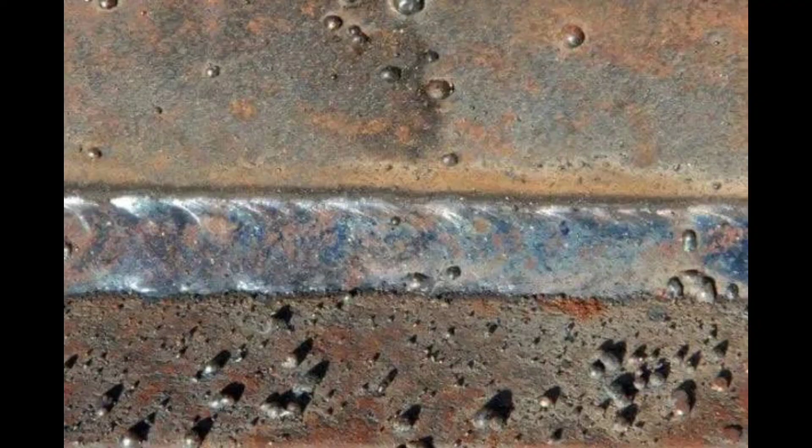So what are the causes of excessive spatter? First is arc blow. Second, welding current too high. Third, too long an arc length. And lastly, wet, unclean, or damaged electrodes.

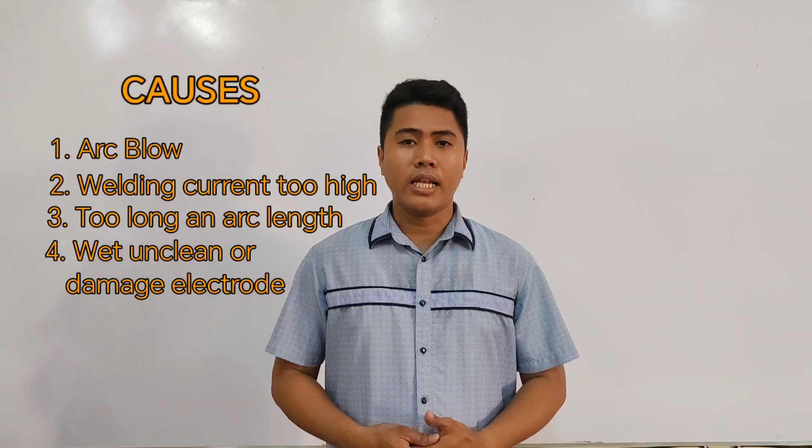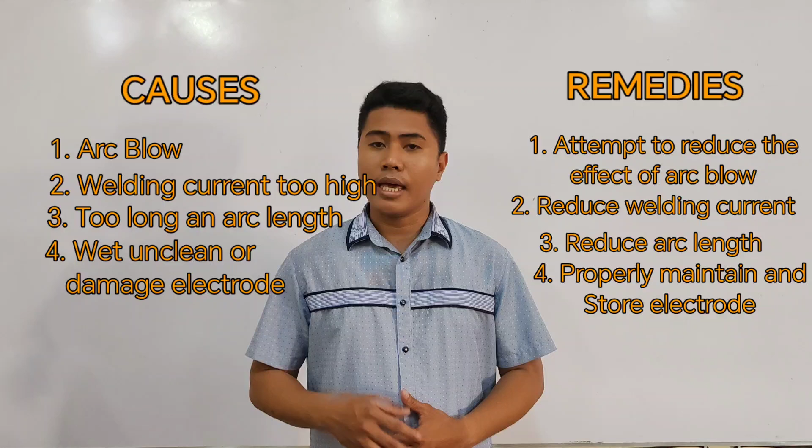So what do we need to do to avoid spatter, or what are the remedies? First, attempt to reduce the effect of arc blow. Second, reduce welding current. Third, reduce arc length. And lastly, properly maintain and store electrodes.

The second welding defect under external welding defects is undercut. So what is undercut? Undercut is an extremely common welding defect. It happens when your base metal is burned away at one of the toes of a weld, a portion of the base metal melted away. This is an example of undercut.

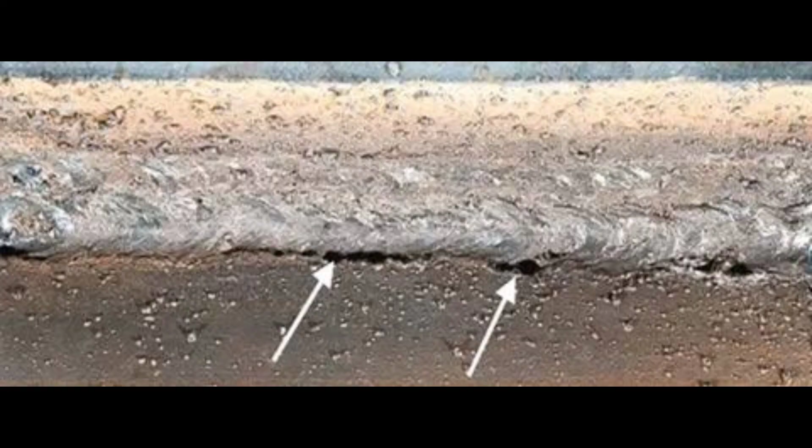So what are the causes of undercut? First is wrong electrode manipulation. Second, welding current too high. Third, too long of an arc length. Fourth, travel speed too fast. And lastly, large electrode diameter. Those are the causes of undercut.

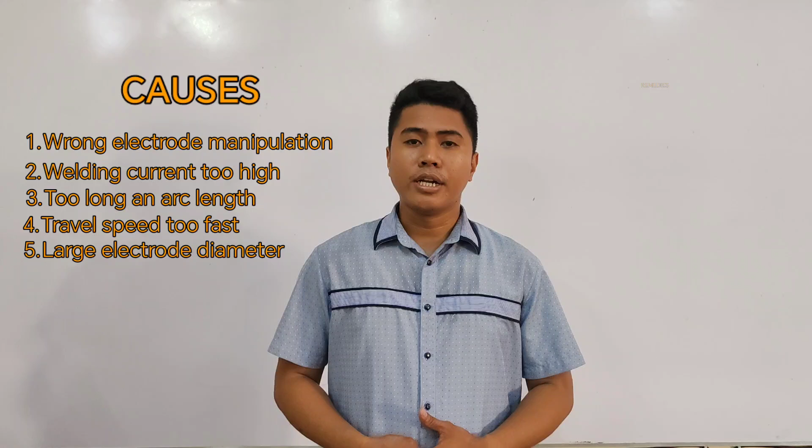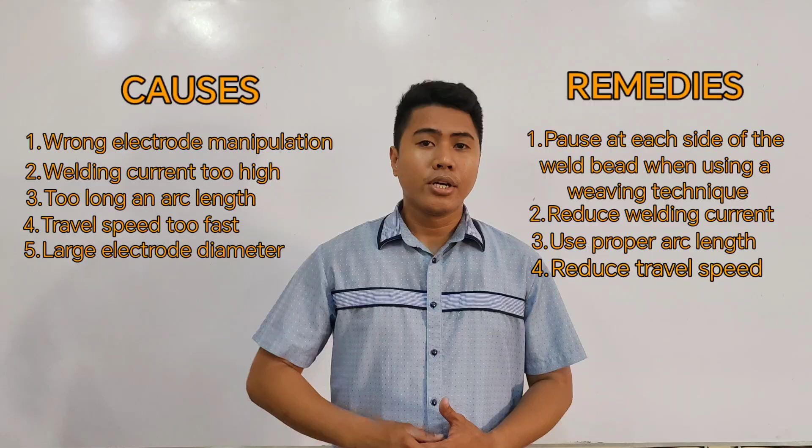Let's proceed to the remedies, or what we need to do to avoid undercut. First, pause at each side of the weld bead when using a weaving technique. Second, reduce welding current. Third, use proper arc length. Fourth, reduce travel speed. And lastly, choose the correct electrode diameter based on the thickness of your base metal plate.

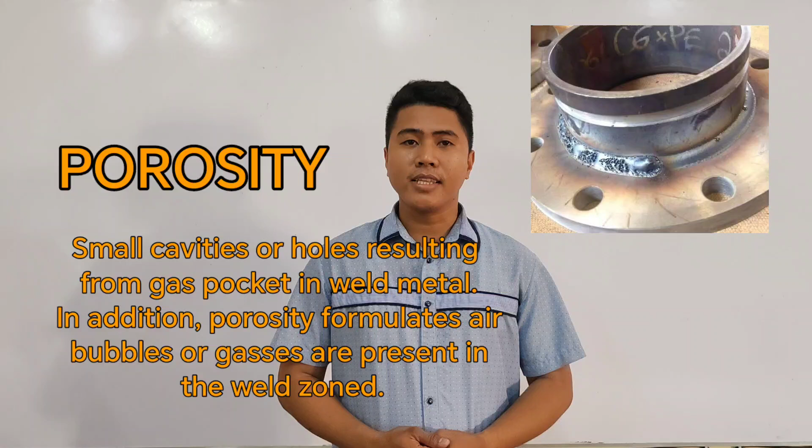The third welding defect under external welding defects is porosity. So what is porosity? Porosity is small cavities or holes resulting from gas pockets in a weld metal. In addition, porosity forms when air bubbles or gases are present in the weld zone. This is an example of porosity.

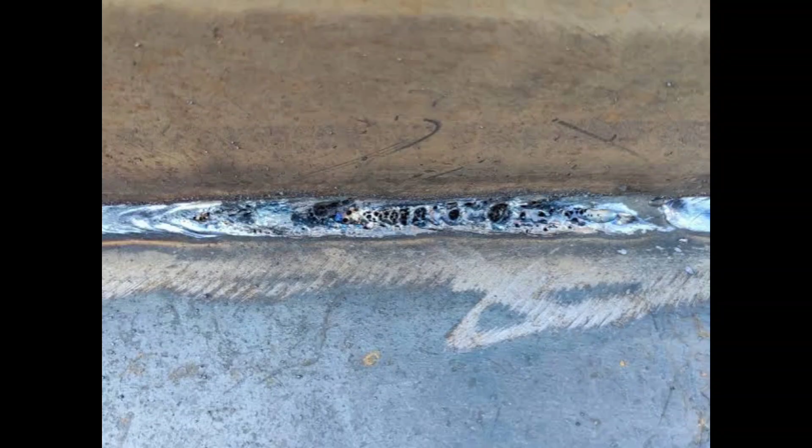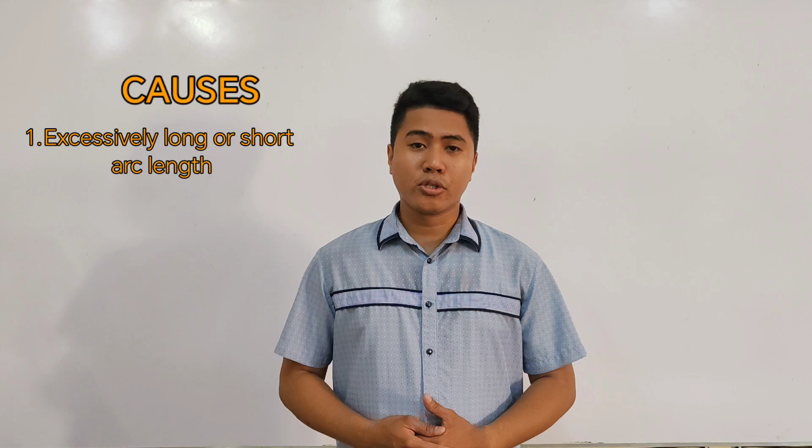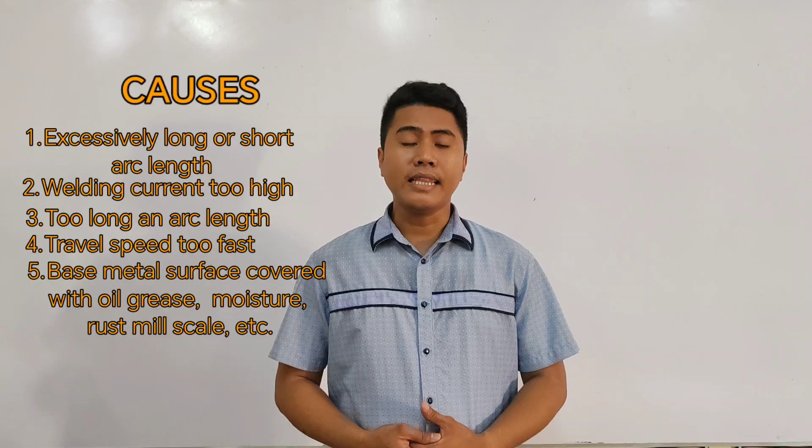So what are the causes of porosity? First is excessively long or short arc length. Second, welding current too high. Third, too long an arc length. Fourth, travel speed too fast. Fifth, base metal surface covered with oil, grease, moisture, rust, mill scale, etc. And lastly, wet, unclean, or damaged electrode.

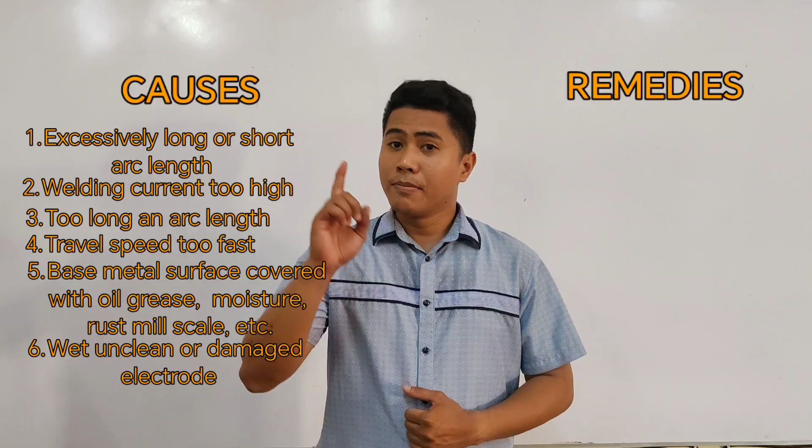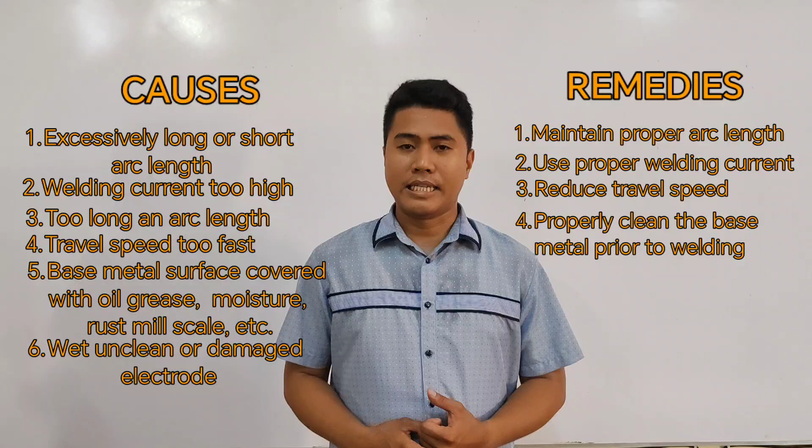So what are the remedies to avoid porosity? First, maintain proper arc length. Second, use proper welding current. Third, reduce travel speed. Fourth, properly clean the base metal prior to the welding process, or prepare the weld materials. And last, properly maintain and store electrodes.

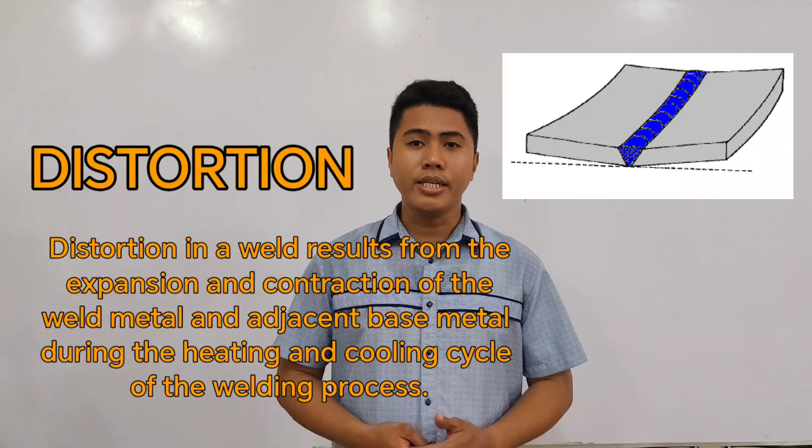The fourth welding defect under external welding defects is distortion. So what is distortion? Distortion in a weld results from the expansion and contraction of weld metal and adjacent base metal during the heating and cooling cycle of the welding process. This is an example of distortion.

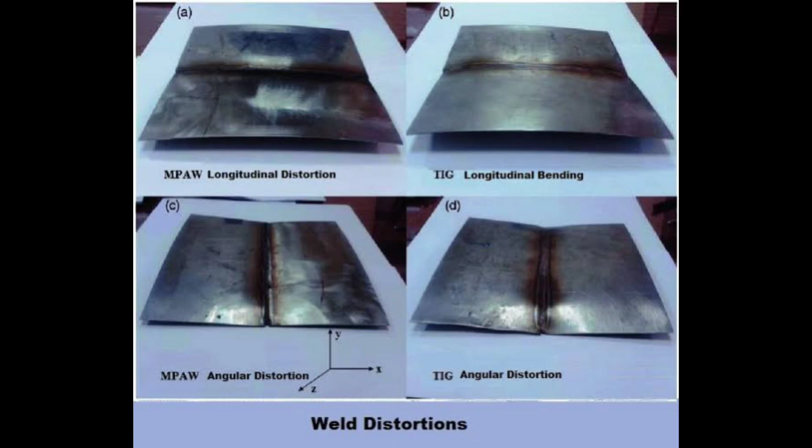So, what are the causes of distortion? First is improper tack welding and/or faulty joint preparation. Second, improper bead sequence. Third, improper setup and fixtures. And fourth, excessive weld size.

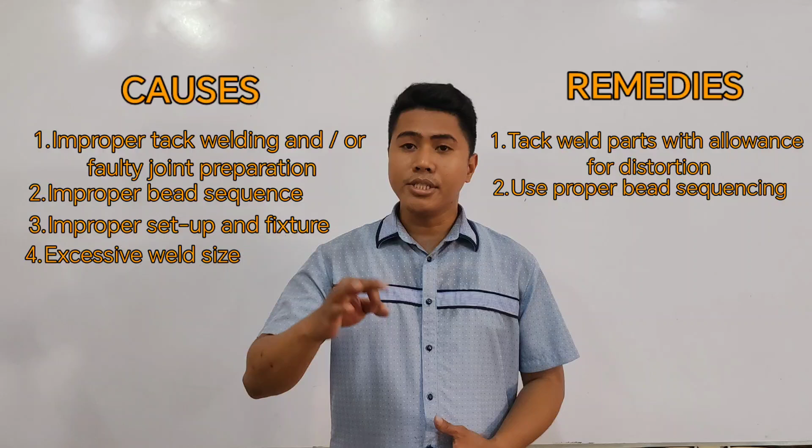So, what are the remedies to avoid distortion? First, tack weld parts with allowance for distortion. Second, use proper bead sequencing. Third, tack or clamp the parts securely. Fourth, make sure to weld to specified sizes.

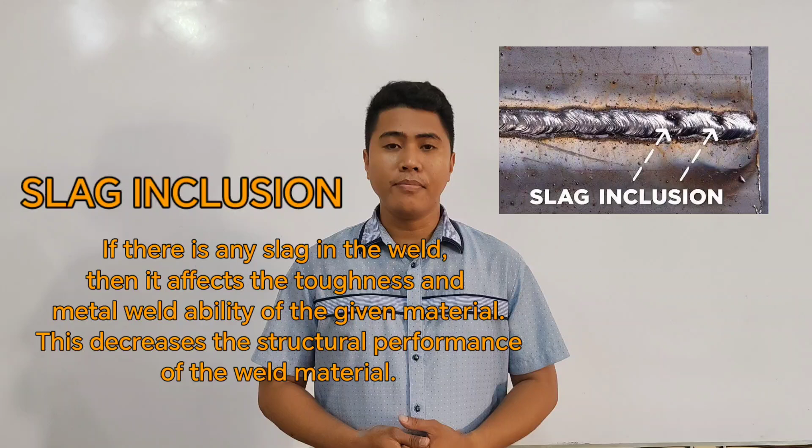Let's proceed to the welding defects under internal welding defects. First is slag inclusion. So what is slag inclusion? If there is any slag in the weld, then it affects the toughness and weldability of the given material. This decreases the structural performance of the weld material. These are examples of slag inclusion.

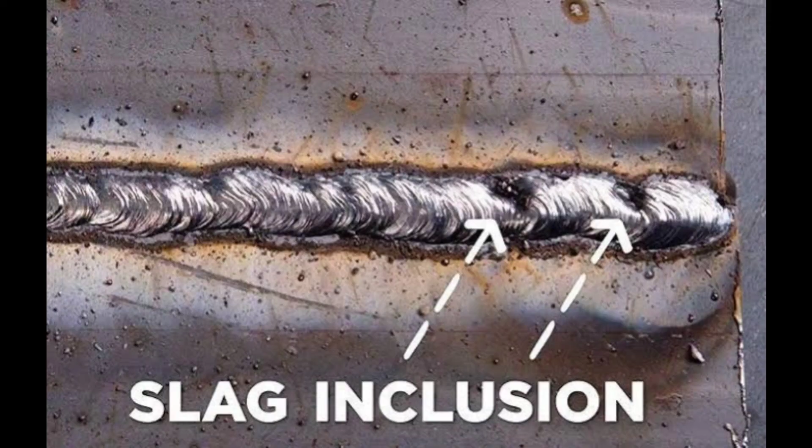So what are the causes of slag inclusion? First is incomplete slag removal between passes. Second, erratic or inconsistent travel speed. Third, too wide weaving motion. Fourth, too large an electrode. And lastly, letting slag run ahead of the arc.

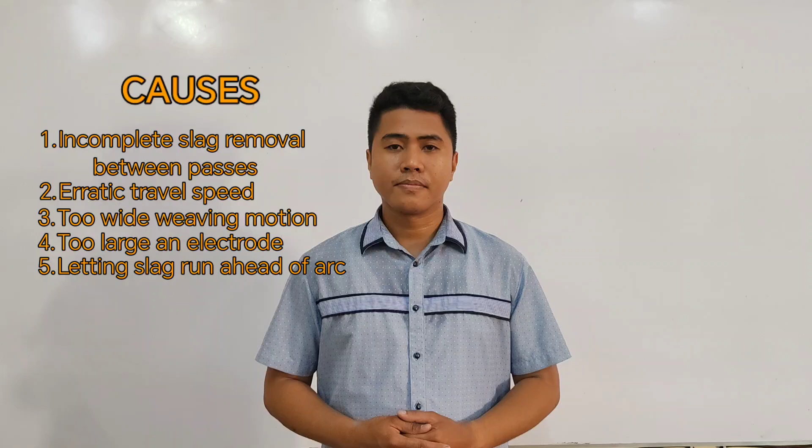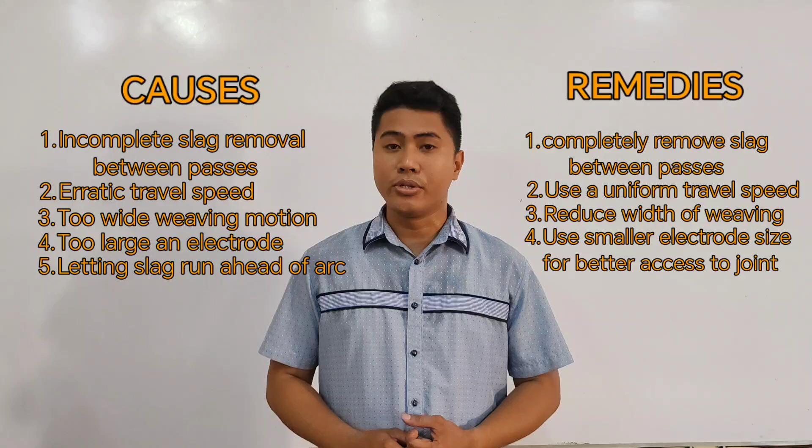So what are the remedies to avoid slag inclusion? First, completely remove the slag between passes. Second, use a uniform travel speed. Third, reduce width of weaving. Fourth, use a smaller electrode size for better access to the joint. And last, increase travel speed or change electrode angle.

Next under internal welding defects is incomplete penetration or lack of penetration. So what is incomplete penetration? It occurs when the root of the weld bead does not reach the root of the joint to weld the opposite surface in the part. This is an example of lack of penetration or incomplete penetration.

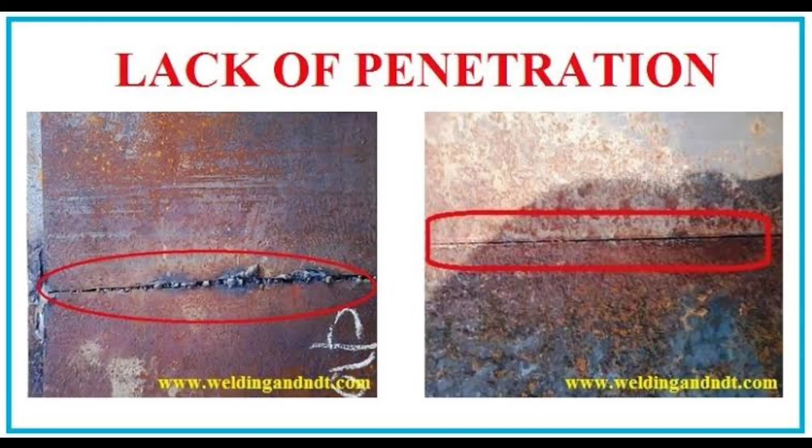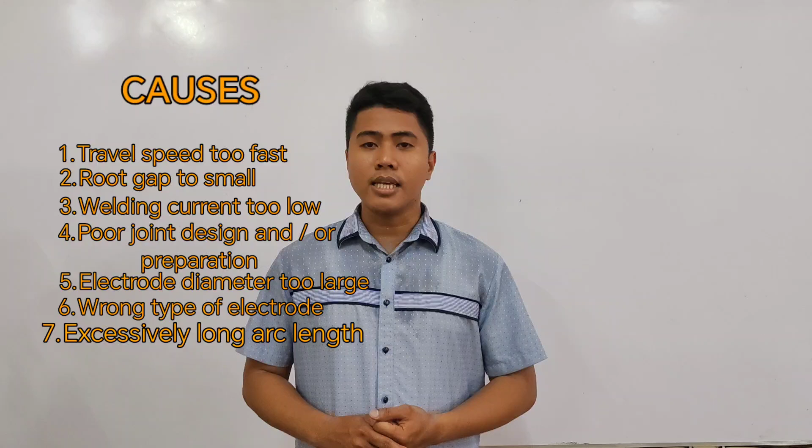So what are the causes of incomplete penetration? First is travel speed too fast. Second, root gap too small. Third, welding current too low. Fourth, poor joint design and/or preparation. Fifth, electrode diameter too large. Sixth, wrong type of electrode. And lastly, excessively long arc length.

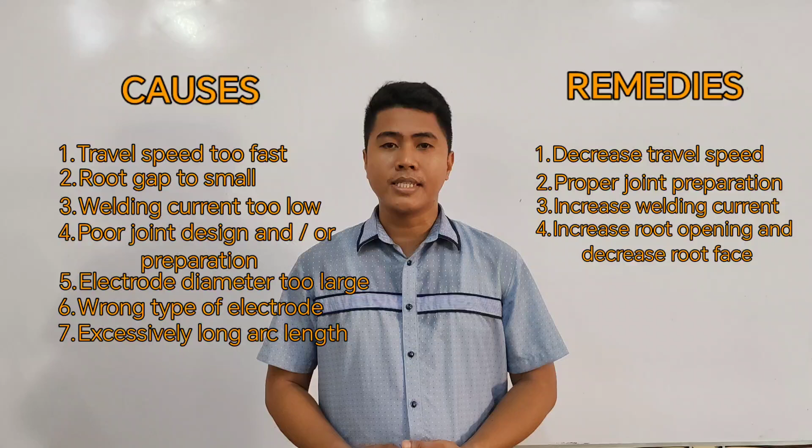So what are the remedies to avoid incomplete penetration or lack of penetration? First, decrease travel speed. Second, proper joint preparation. Third, increase welding current. Fourth, increase root opening and decrease root face. Fifth, use a smaller electrode. Sixth, use an electrode with deeper penetration characteristics. And lastly, reduce arc length.

So those are the different welding defects. What is the importance of identifying them? Knowing or identifying the different welding defects is important because they can compromise the structural integrity of the weld, leading to potential failure.